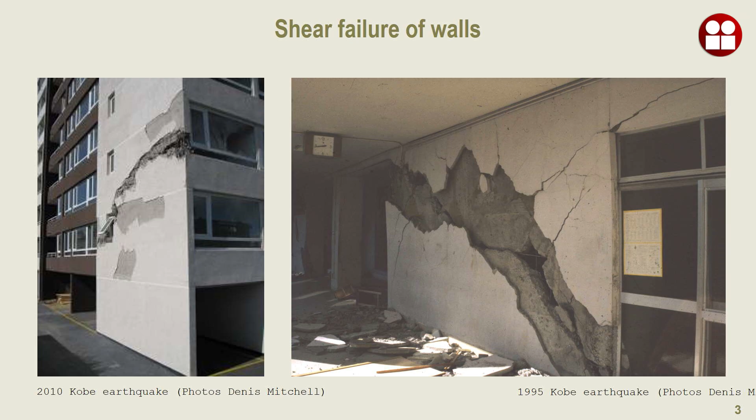And we have examples of shear failure. They are rare, but you can find some, actually this one here in Chile and in Japan. And you might have seen also that it's not shear failure of walls, because that building had a number of shear walls. There were some problems with them, particularly they were too thin and not well designed.

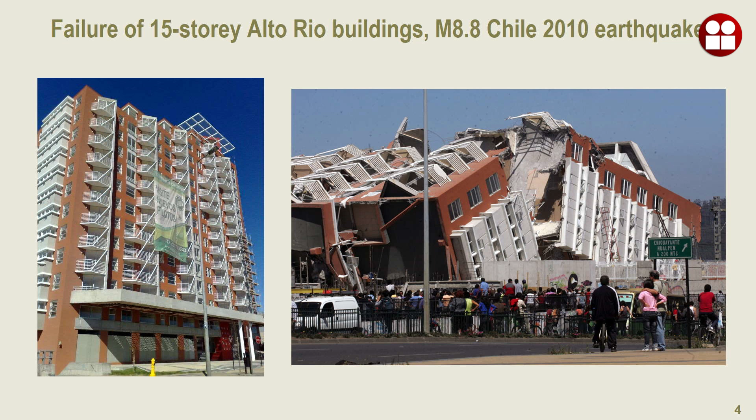In Canada, we use capacity design, where you have a ductile link, some say in French, that will protect all the fragile system. When I say fragile system, I would say shear is a fragile failure, and you want to avoid that. So flexure will be the mode of failure that you will be looking for.

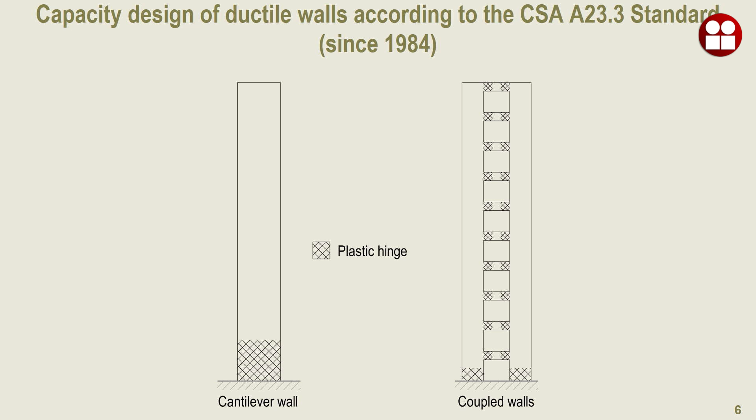In Canada then, we will design a wall to have a plastic hinge at the base, and coupled walls with plastic hinges at the end of all coupling beams before having hinges at the base of the walls. And if you look at the simple seismic force distribution, this is the factored bending moment, and you have the factored shear. When I say factored, it's the elastic force times a factor that is usually larger than 1.

Now, when we do the design, we will calculate the reinforcement here, estimate the probable moment resistance, which is calculated with yield stress equal to 1.25 Fy. Having MP here, we would increase the shear by that ratio of the probable moment resistance divided by the factored moment resistance at the demand, actually at the base.

And in 1995, following the New Zealand code, it was said to increase again the shear by a factor beta V. The problem with the Canadian code is that they said to increase it, but they didn't give any formula. So nobody knows what to do with that, because beta V doesn't have any value or any reference to calculate it.

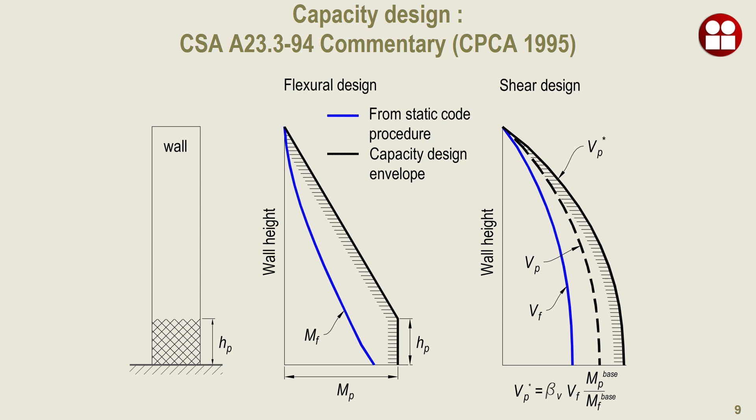It was recognized in one paper in the 1970s that even though you design under capacity design principle, you might have yielding higher up, not only at the base, but particularly the shear would be larger than even the one that was amplified. It was not really recognized why we had that increase in shear when it would have been limited by the capacity of the wall at the base.

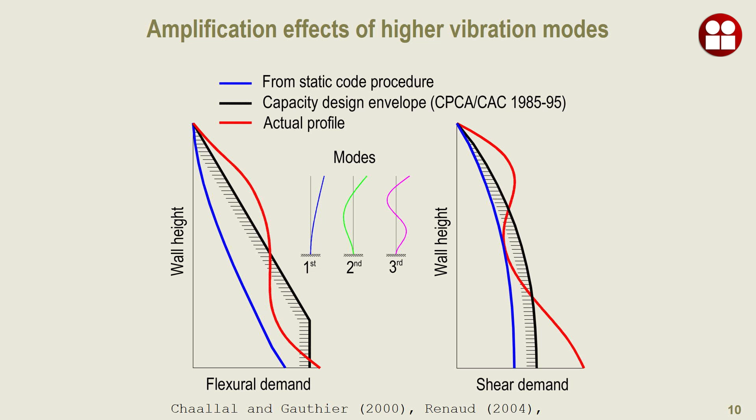Later on, it was recognized that it's due to the higher modes that you would have that increase.

In 1984, the Canadian code changed, and instead of calculating the probable moment, what we do is design for the moment resistance, keep the same amount of reinforcement over the plastic hinge zone, calculate the moment resistance at that point, take the ratio of that moment to this moment, let's say it's about 2, and increase all the bending moment by the factor obtained at the top of the plastic hinge, so by 2.

Having done so, you would increase also the shear diagram, again by multiplying by the probable moment resistance divided by the demand at the base. This is the design shear that you would use to design your wall.

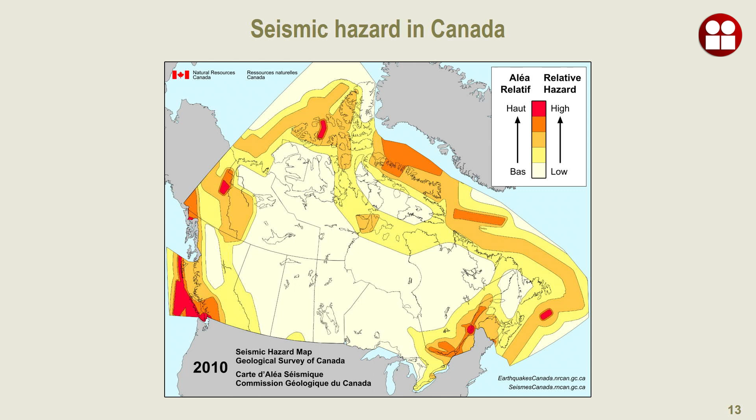In Canada, there are really two zones of seismic activity. In the west, Vancouver being the highest risk, and you have Montreal with the highest risk in the eastern part. The earthquake waves propagate at a very short distance in the west, but in the east they propagate at very large distance - any earthquake here would propagate up to New York, Boston, or even Philadelphia. Also, there is contribution of higher frequency in this eastern zone compared to the west part of Canada. So we have to take care of both areas, western and eastern Canada.

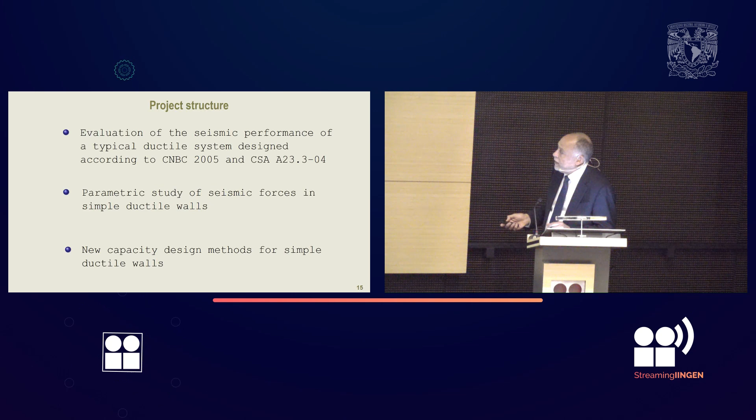So let's look at shear walls first, and we considered the western part first. What we did is try to see what are the most important characteristics on the shear amplification. So we studied different types of walls, number of stories, fundamental period, aspect ratios, flexural overstrength at the wall base.

Flexural overstrength is the probable moment divided by the demand. It could be between 1.3 to 3 or even 4.

Site class varied from A, C, D, and E, and wall cross-section as you have here. We found out that only the period of vibration will control the response. So that's one particular parameter we have to account for, and flexural overstrength needs to be accounted for as well.

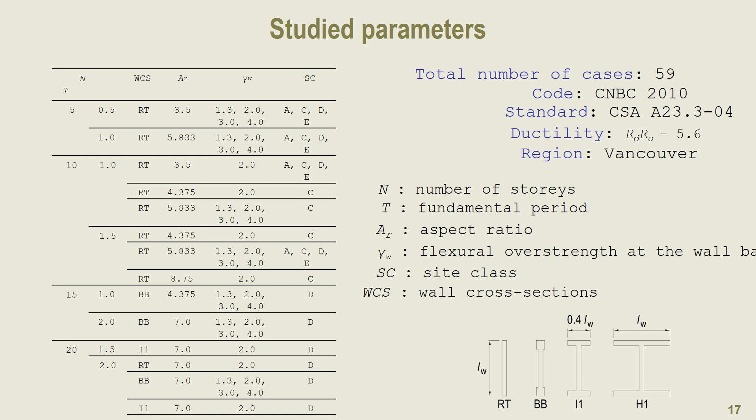What we did - I didn't mention it, but let me get back - we have a building with a number of stories ranging from about 5 to 40 stories, and we modeled it with two computer programs, OpenSees and Vector2 from University of Toronto.

Vector2 has interaction between flexure and shear, so it's way better than OpenSees, which doesn't have interaction between shear and flexure.

We have a concrete strength of 40, Fy is 400, and we varied rho according to what we would have in practice. 10% of axial load is usually what is the axial load acting on walls. P-delta effect was accounted for, and damping we took 2% for the first and the last period of vibration of importance.

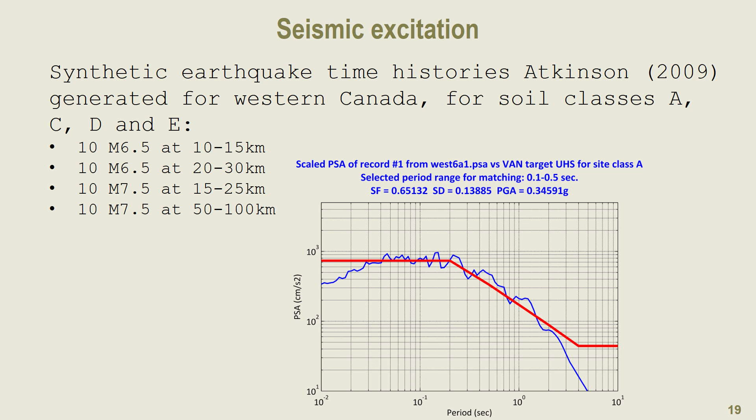For the earthquake, we started about 10 years ago by using generated earthquakes by Atkinson, but we changed after that. What you would have is the probable shear resistance, and we would find that the shear is larger than that - we call that V dynamic. We can then estimate the amplification factor, omega V, which is the ratio of V dynamic divided by V probable. We can calculate that at the base, or calculate an average over all stories.

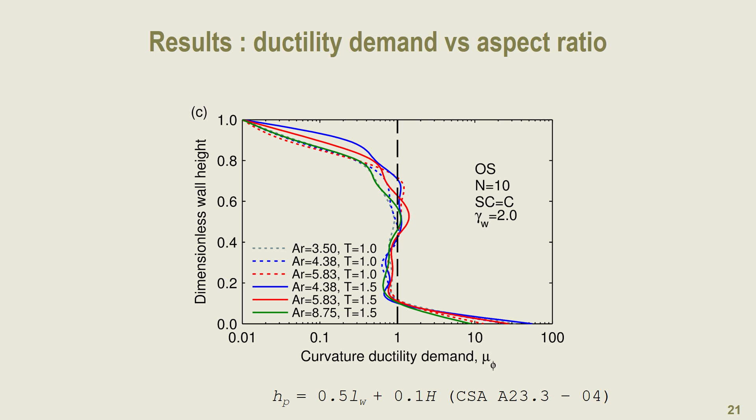We found out that those factors didn't influence quite a lot, except that for gamma W less than 2, we would have hinges forming somewhere else from the base. But if you have gamma W equal to 2 or larger, you would not have yielding higher up. So really, one thing a designer could do is just start by designing with gamma W equal to 2 or even larger, and then you will not have to consider yielding at height.

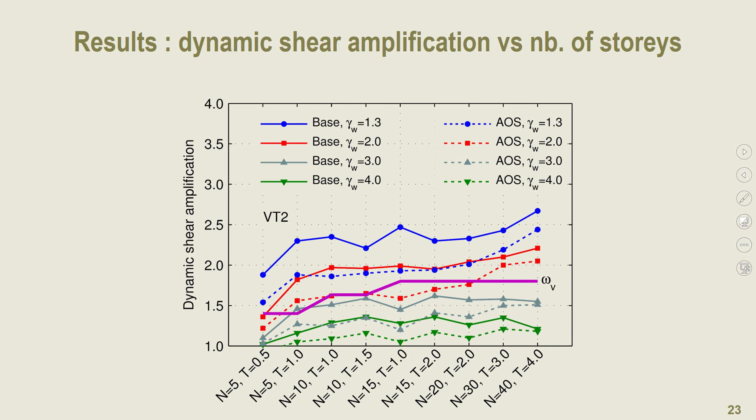The important thing is that graph, where depending on the period of vibration - this is number of stories, because in New Zealand they work with number of stories - if you consider the period of vibration from 0.5 to 4, you see the dynamic amplification factor is larger than 1. Most of the time it will be constant over the range of period, larger than 1. So having done that, we proposed it to the Canadian Code, and they adopted it somewhat, but limited it to 1.5, whereas you could have it even larger than 1.5, say 2, or even going to 2.5.

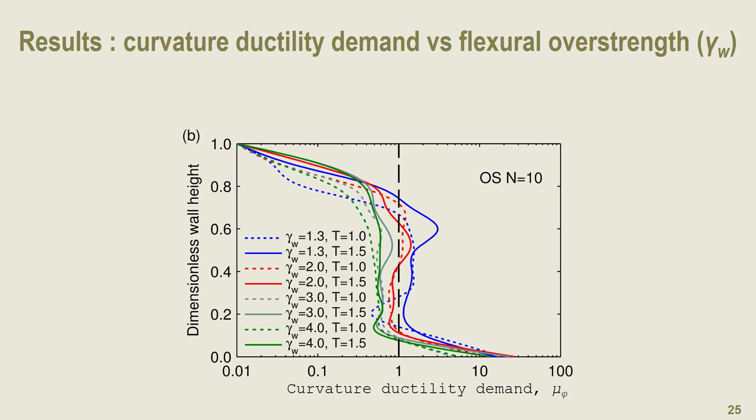Let me skip so I don't overdo the time that was allocated to me.

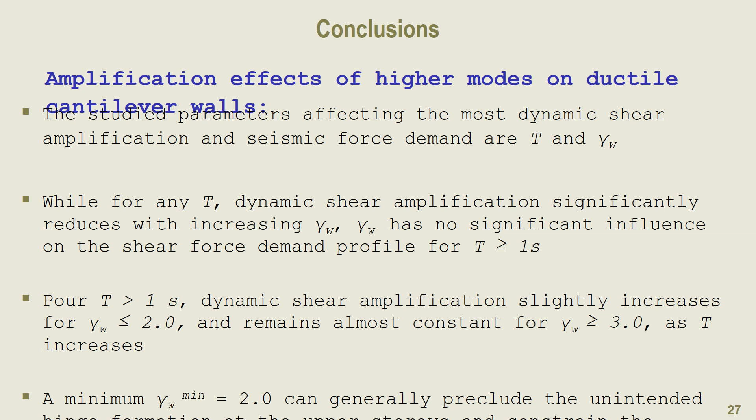The capacity design method prescribed by the CSA produces envelopes that significantly underestimate the demand, so you might have potential risk of shear failure, and then you need to use an amplification factor. The important conclusion is that for a period larger than 1 second, if you have gamma W equal to 2, you don't have to worry about yielding of the wall higher up the height.

The thing is, we did it for Western Canada first, so we had to do it for Eastern Canada, and then we started again. I didn't mention it, but the total number of analyses we did for Western Canada is over 10,000. We did the same for Eastern Canada, over 10,000 analyses, because you have a number of buildings, about 40 different time histories to consider for each building, and different soil classes, different gamma W, so it's a very large number. We had to use the parallel computer at University of Sherbrooke, and we could do it in a reasonable amount of time.

This is the spectrum for Western Canada, in Vancouver. So we had to find a site in Eastern Canada that compares with the western part, and we chose Rivière-du-Loup to put the buildings and do the analysis.

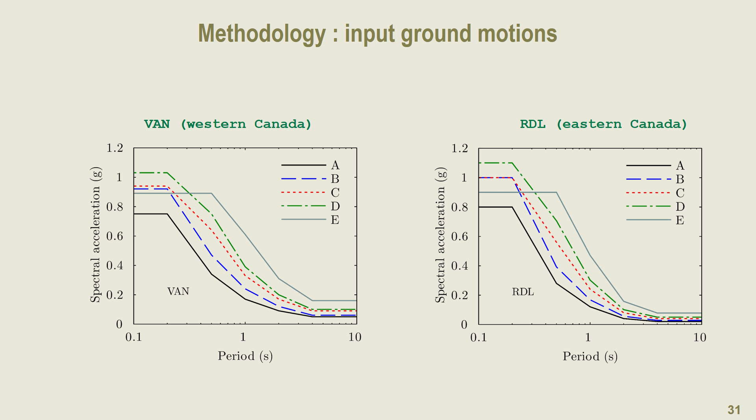The spectra are compatible, not in the frequency content as I mentioned, because higher frequency content can be found in the eastern compared to the western part of Canada. Again, all the analyses show that you do have amplification and formation of plastic hinges higher up if gamma W is less than 2. If it's larger than 2, then not a big problem. We do have shear amplification.

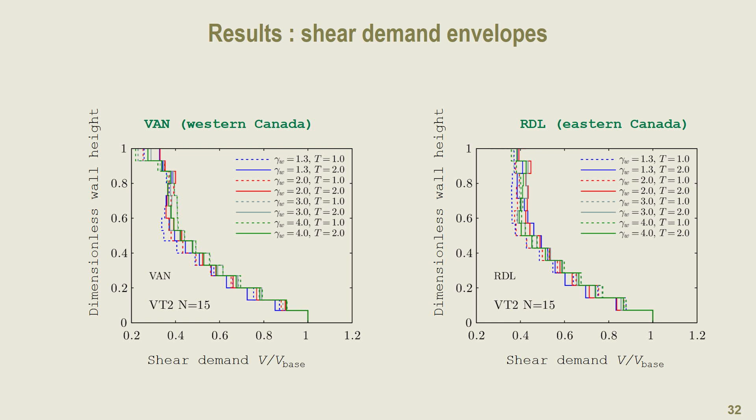The difference actually is that we have shear amplification even for very short buildings compared to Vancouver, for example. Again, as you can see here, we do have possibility of yielding somewhere along the height of the wall. At 1 here is yielding, so at the base we do have a plastic hinge at the base, but we can have yielding here when you have gamma W less than 2.

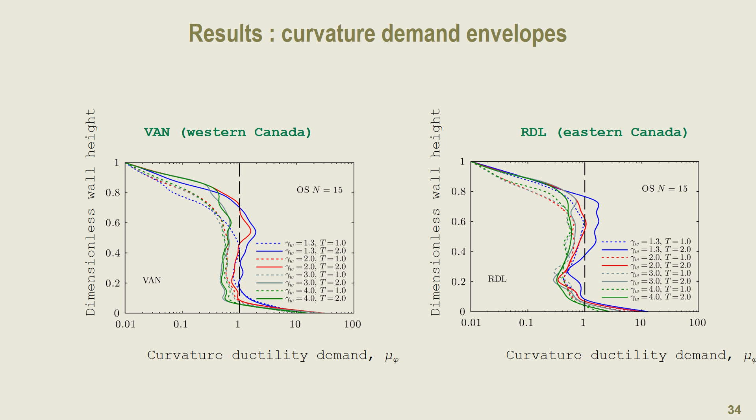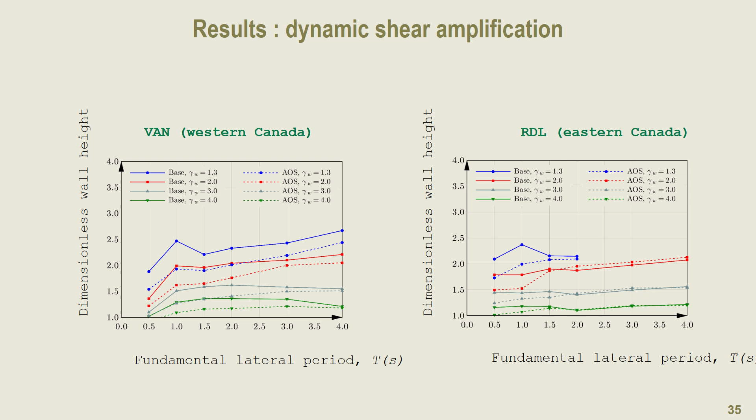So this was the first proposal for the west part of Canada. Again, as you can see, there is an increase up to 1 second, and then about constant from there on. Same for Eastern Canada, although I'm not showing it here. We do have contribution between 0.25 and 0.5, which is different than for the west part of Canada.

So this is what, from the results we obtained, has been adopted in the Canadian code: something equal to 1 up to 0.25, increasing linearly up to, say, 0.5, and then kept constant over the range of lateral period, but limited to 1.5. That is, you cannot have the factor larger than 1.5. As I mentioned, we found in our analysis that you can have a factor of 2 or 2.5.

Coupled walls were not considered. Why? Because it was thought that coupled walls are like frames, and we haven't seen any shear amplification in frames. So it was decided not to have amplification for coupled walls. So I decided to have a look at it and see what is going on.

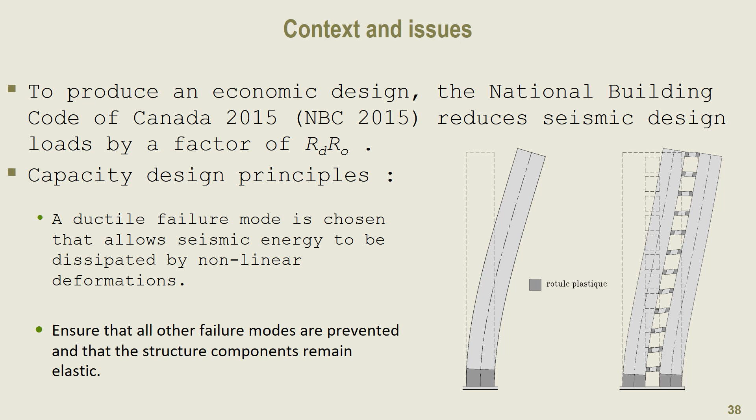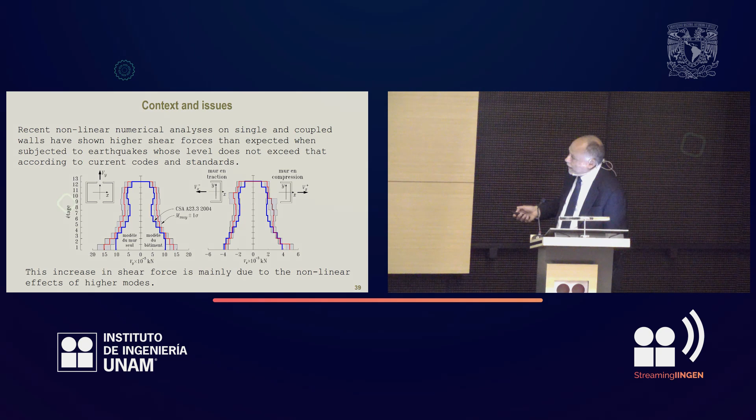I remind you that for coupled walls, yielding is at the end of the coupling beams before you have yielding at the base of the wall, according to capacity design principles. And I can see that because that's basically what you have seen before - this is the actual probable shear resistance, and then when you do the analysis, the average plus or minus 1 standard deviation is quite larger actually than the probable shear resistance.

Let me quickly mention that when you design in Canada, the design shear V is equal to V elastic - some formula very close to whatever you have in different countries - divided by RD and divided by RO, as opposed to the United States, here we have two different factors. These are ductility-related factors varying from 1 to 4, and RO is the overstrength factor that would vary between 1 and 1.7 at best.

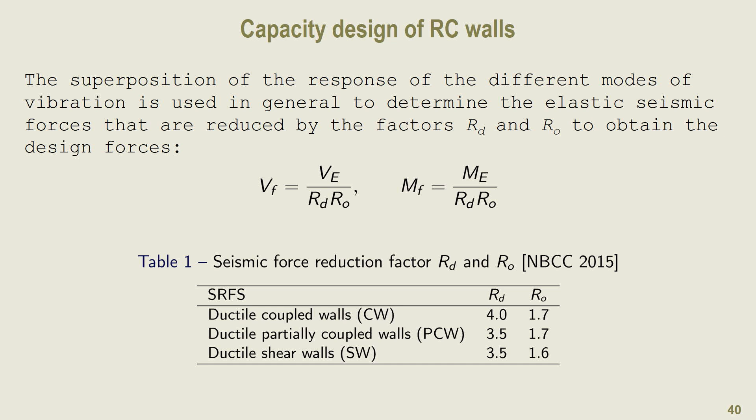So for ductile coupled walls, RD would be equal to 4 and RO 1.7. For partially coupled walls, 3.5 and 1.7. And for shear walls, 3.5 and 1.6.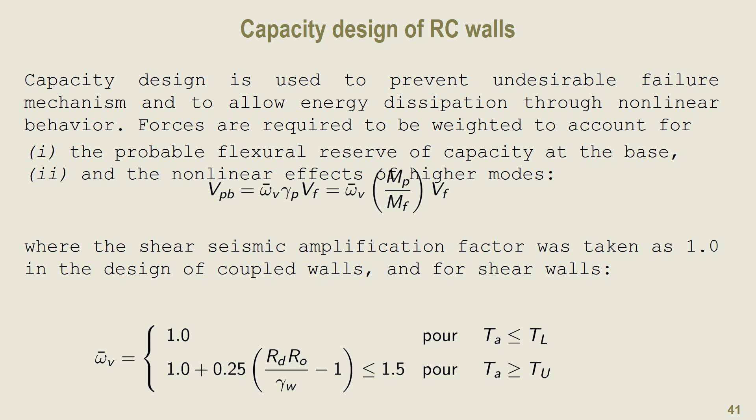So this is actually the formula that has been used in the Canadian code. And we did some parametric study again to see the effect of all those parameters, and then after that conduct the study, retaining only the most significant parameters.

So this is the set of data that we use. Degree of coupling is the moment taken by the axial load acting on both walls divided by the total overturning moment. And it varies between 30% to 75%. When you reach 65%, below 65% in Canada, we call that partially coupled walls. Larger than 65%, it's coupled, fully coupled ductile walls. And overstrength varied between 2 to 4.

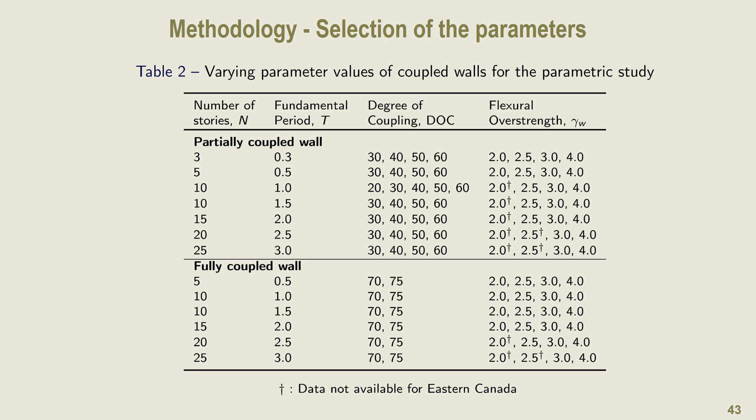As I mentioned before, we use the uniform hazard spectra to generate the earthquakes. But it was actually recognized that this is not very good to use that type of signal for the studies that we did. So we changed, and what we are using now is the conditional mean spectrum, where you condition the time history on a specific period. Usually it's the first period; in that particular case we would use the second period. But we would also condition it on a minimum and a maximum value at 1 or 2 standard deviations, so we would have a good match of the time history compared to the spectrum that should be used for the area.

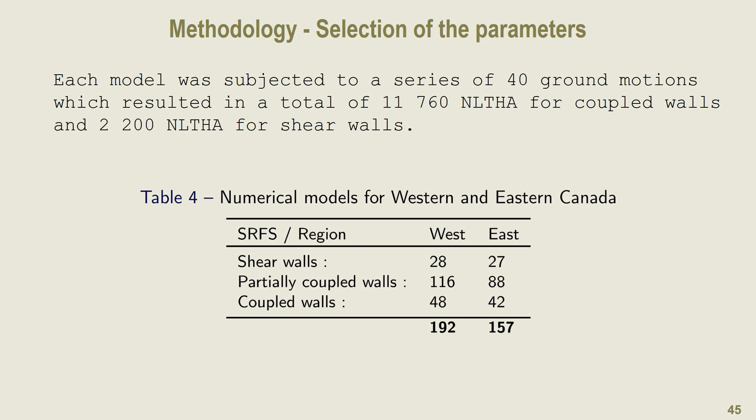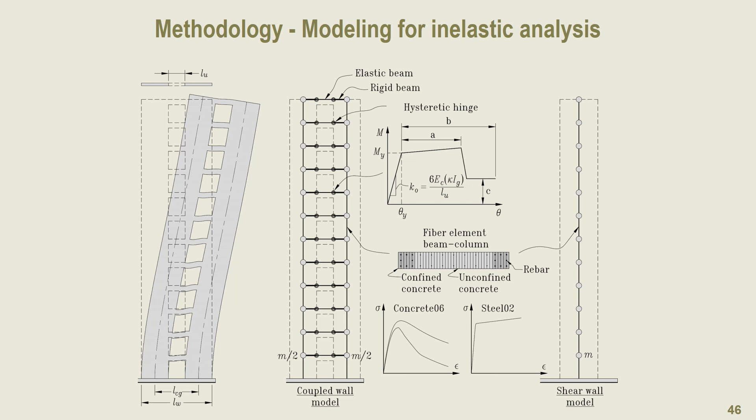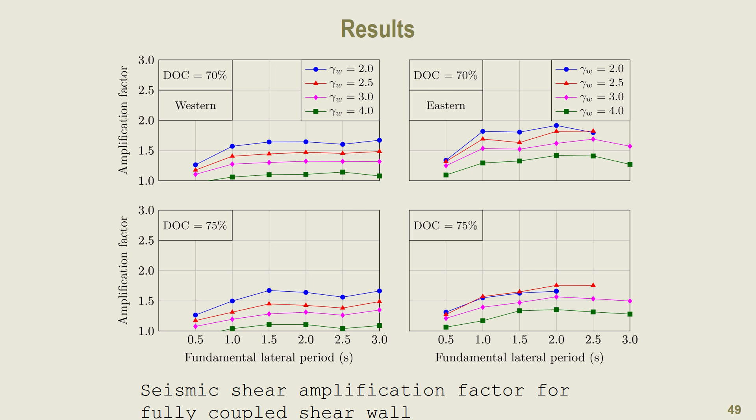The conclusion: the amplification varies with the degree of coupling, from 30 to 45, reducing again at 50 and 60, and at 70 we have a quite reduced value, around less than 1.5. The amplification factor, when we look at it against the fundamental period for the West and the East, shows about the same tendency, a little bit larger for the East, with contribution of higher modes even for short buildings, as opposed to the western part of Canada.

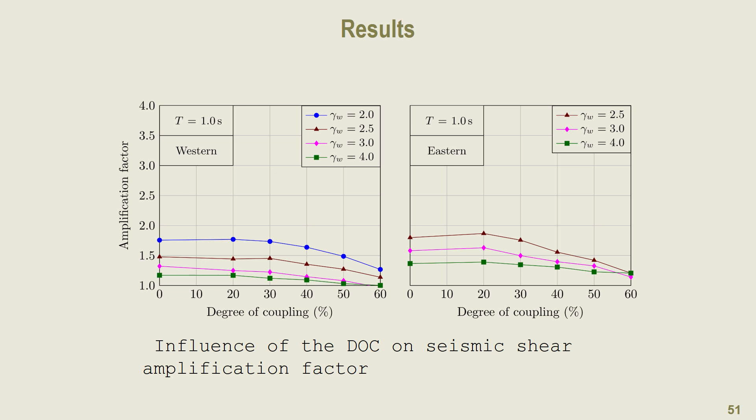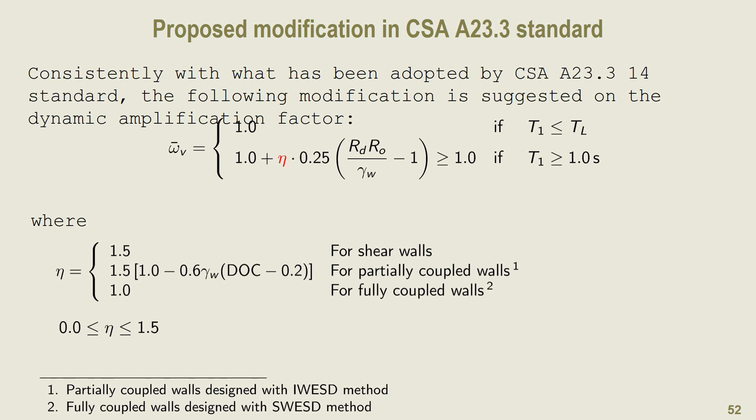So there is some change to be done on the code. I hope in the next edition of the code we should have it. The amplification as a factor of degree of coupling starts at a constant value and then reduces with increasing degree of coupling. It's an easy thing to fix because you just have to enter that parameter, which depends on whether you have a shear wall, a partially coupled shear wall, or a fully coupled shear wall, and depends only on the degree of coupling. Hopefully that can cover it, except that the 1.5 maximum cap value that we have in Canada, I don't think that's good enough. The expression for eta can be found easily, depending on gamma W and the degree of coupling.

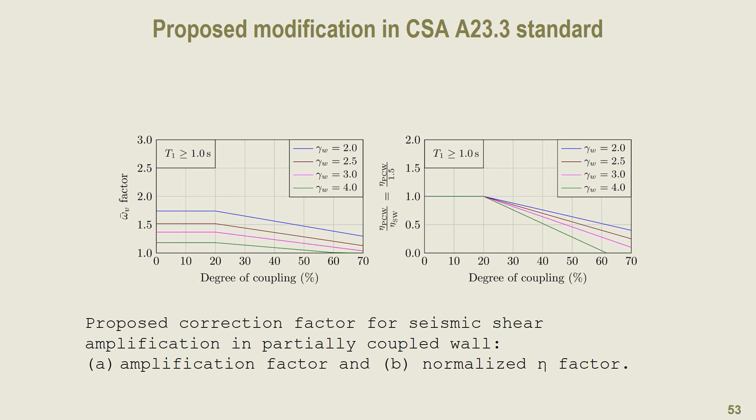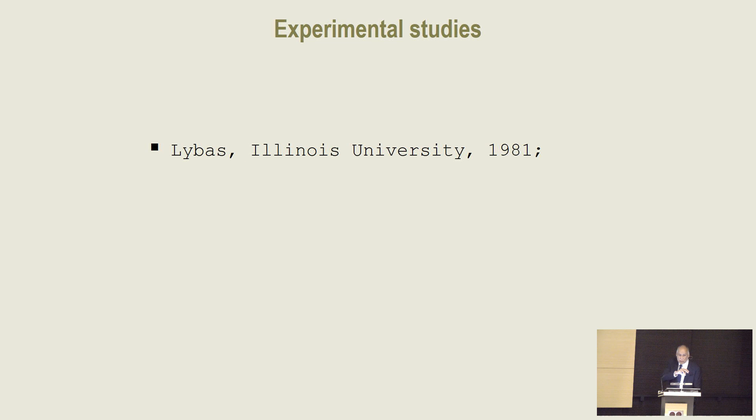And for experimental studies, I know of only one, by Lybas from University of Illinois. It was by accident, because he tested a small scale coupled wall system and saw that the shear was larger than what was expected.

So let me make it very simple. When you have a triangular seismic load applied to your building, the resultant will be at a certain height, R. When you have yielding at the base, the distribution changes, and that force's location moves lower. The moment is still the same because the force increased while R is reducing, but force times lever arm remains equal to that moment. However, shear will be larger because that force is increasing due to the reduced lever arm.

So the thing that we decided to do is a hybrid test, and we designed an 8-story building. The upper part we kept elastic, although it could have yielding, and the base over the height of the plastic hinge we would test in the laboratory. The two are actually linked - we will analyze this with the computer program, it's linear, and this part will be tested in the laboratory.

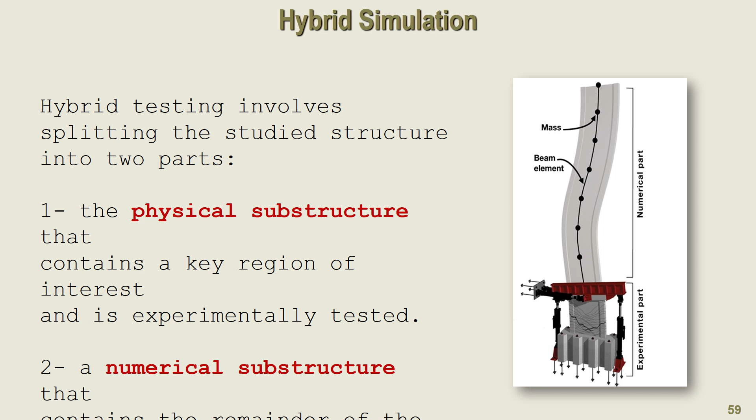So let me quickly move to the experimental verification. What is going on is you're modeling this, and this is the equation of motion. There is a link between the two. I don't know if you're familiar with hybrid tests.

The stiffness matrix times the displacement would give you the force that will be input back to the analysis. You would feed the displacement that needs to be imposed horizontally. It's not an easy test to do - actually it's a very, very complicated test and took us a long time before we could fix everything.

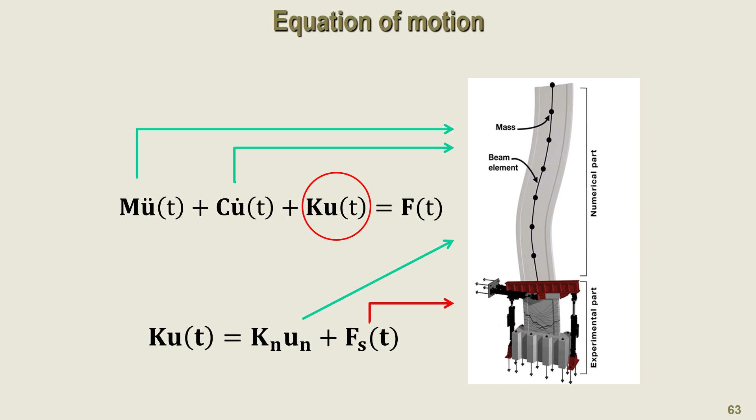So really what is going on here: you take the time history, send a displacement to the jacks here and to the two vertical jacks that move horizontally and rotate the building or the wall, then measure the force in all 4 jacks, send it to the finite element program, calculate displacement, velocity, and acceleration, go back here and keep doing that in a loop and progress in the test.

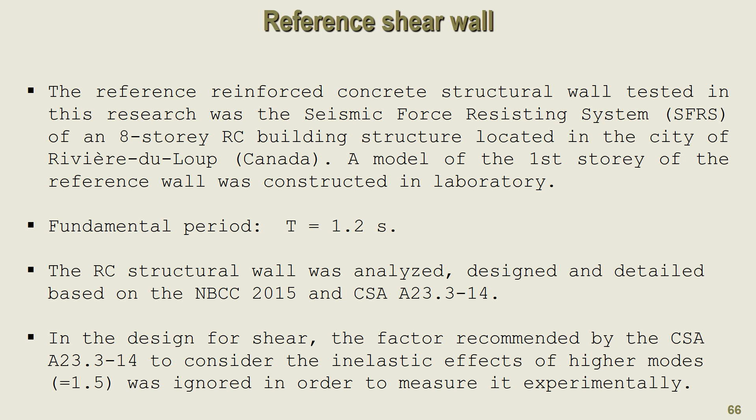So really we had a building with a 1.2 second period. As I mentioned, it's a single shear wall designed according to CSA A23.3 2014, which is the latest edition of the code.

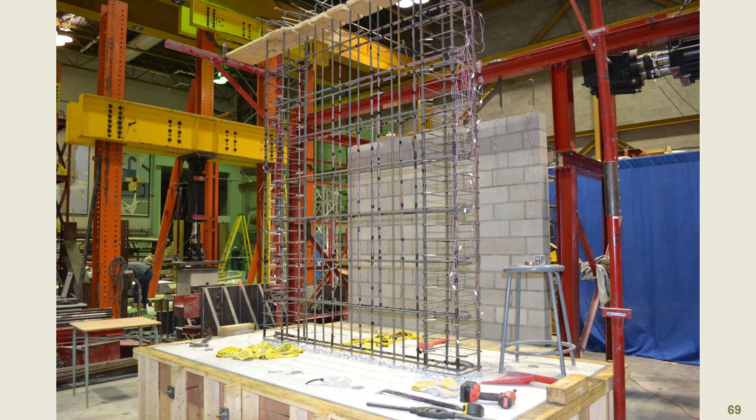This is the base, it's pretty big actually. This is the reinforcement for the base before casting, and this is after casting the base. This is the wall without the head - we will cast that later on. In the back, this is a masonry wall that we would be testing later on.

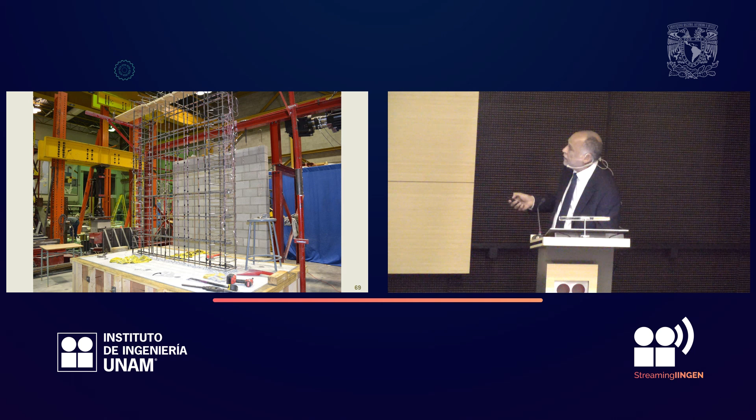For the test, there is a set of computer programs that need to be used. OpenSees is the main finite element program analyzing the top part of the building and predicting the displacement. OpenFresco takes those values and transfers them to LabVIEW. LabVIEW transfers those to the controlling system, which is an MTS control system that imposes the displacement, gets back to OpenFresco, and OpenFresco sends the result to OpenSees, and that is done in a loop.

The trouble is that connection point, which needs to maintain compatibility between the two. If it was stiff it would be easy, but when you have cracking there's a problem, because the neutral axis moves from one point to the other, whereas OpenSees considers that the rotation is about the center of gravity. So we had a big problem there.

The other problem is that it's very stiff at the beginning. When it's cracked, it becomes very flexible, and control is a little bit tricky at the start. So we had to control that point.

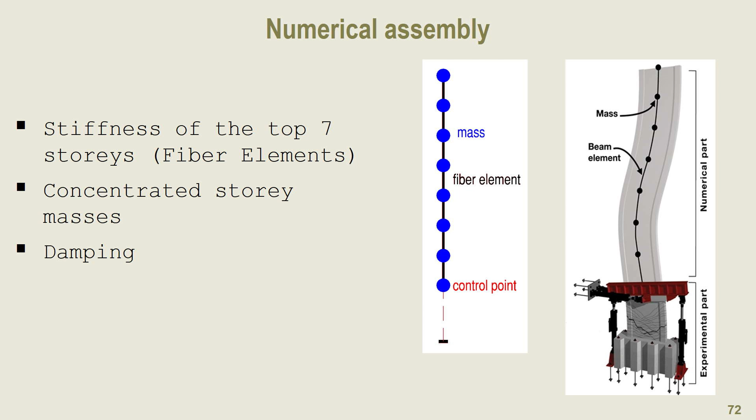So what we did: first let's look at the equation of motion that you have here. There is only one mass in direction 2, M2, which will give you a damping matrix proportional to M and K. So there is a term that is here and another that is there, and that one will cause trouble.

Why? Because we don't have that displacement in the vertical direction, and we need to remove it, because in OpenSees the point of rotation doesn't move up and down, so we cannot have a velocity and a displacement at that point. What we did, since Fy, the vertical load, needs to remain constant, we had to kill that term. How did we do that?

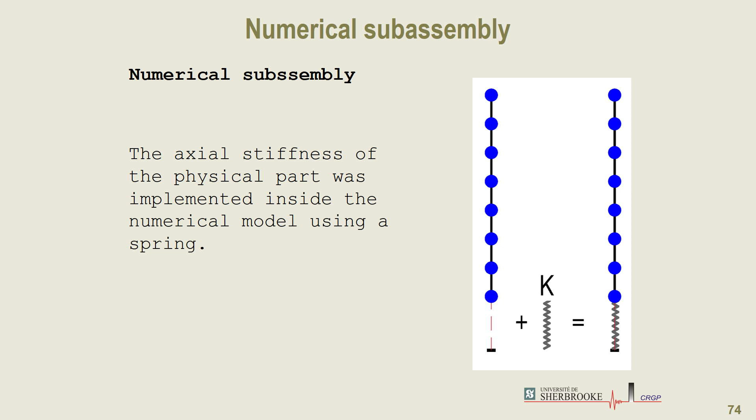By putting a zero-length element of constant stiffness, not in the experimental part but in the numerical part. Because it's constant, the axial load will remain constant. Then we just have to verify that we have equilibrium between the two vertical actuators.

So that's what I explained. The trouble is, at each step of the analysis, we need to find where that neutral axis is. That's a very complicated problem, actually.

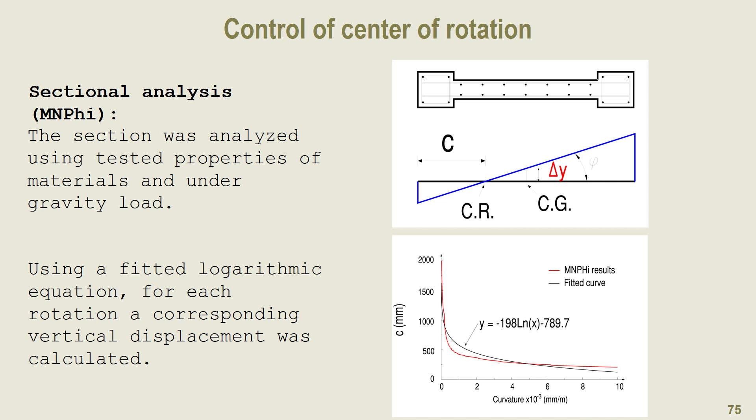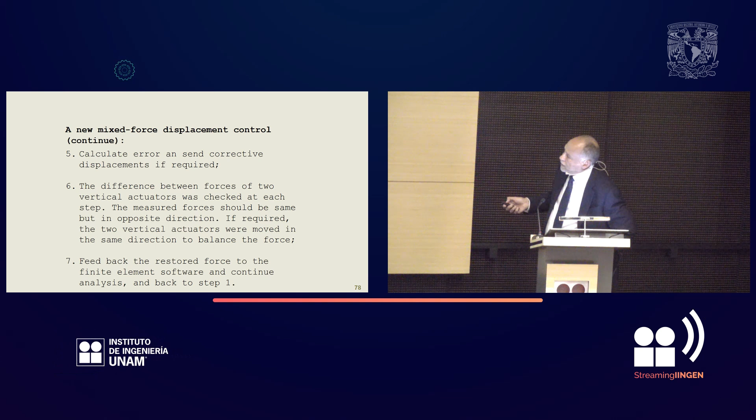We had actually to control the error and then also correct for when we have to stop. I don't want to go into that, it's kind of very complicated. But anyway, from OpenSees here to OpenFresco, we are solving, introducing the demand, seeing if we need to correct. If we don't need to correct, or we need to correct, we have to go up here, and again verify that we have equilibrium between the vertical actuators. If we have equilibrium, we can move up and then go back and start the loop again, like that.

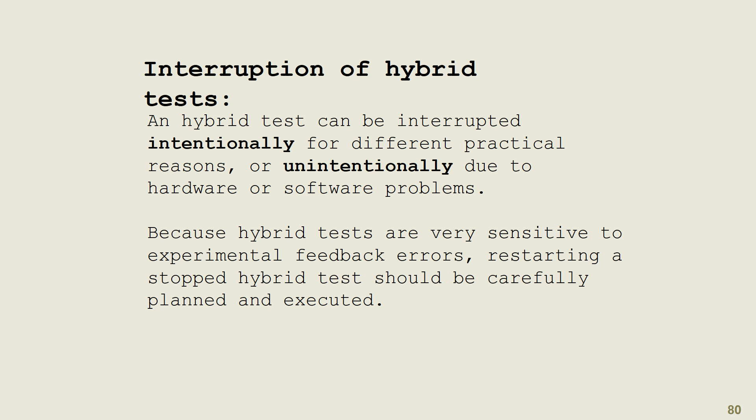This is the numerical part, and this is the test part of the experiment. The problem is sometimes you need to interrupt. One test would take more than one day to do, maybe two to three days, so you have to restart the next day. So we had to develop a restart procedure that I don't want to get into really. Or if it's interrupted for any reason, we have to restart it again. So we developed a method of actually starting the test after some interruption.

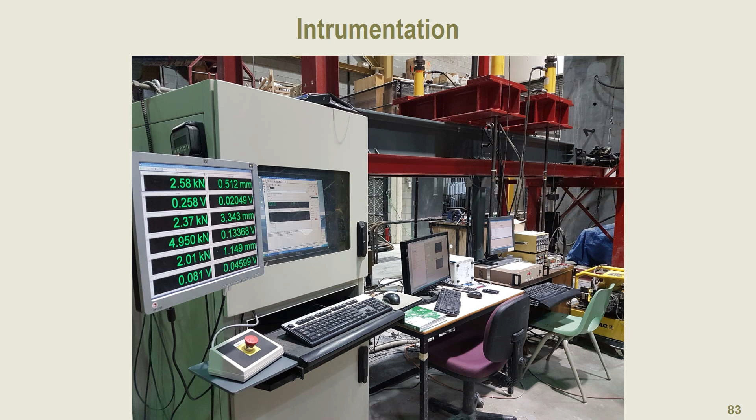And I mentioned that, this is the final setup, as you can see here. The wall was heavily instrumented to measure even the displacement at the base of the wall. All the reinforcement was also instrumented, with gauges here and horizontal for shear.

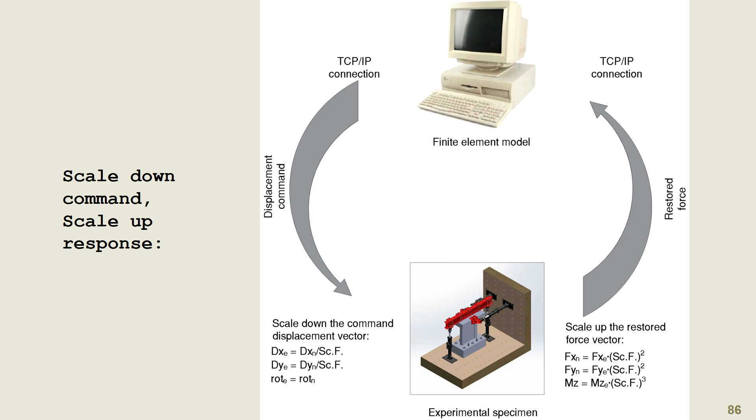What we did is use three different motions: GM0, which is a very small earthquake that we use just to make sure our test setup is functioning properly; GM1, which is actually the design earthquake level; and GM2, which is a much larger one and shorter.

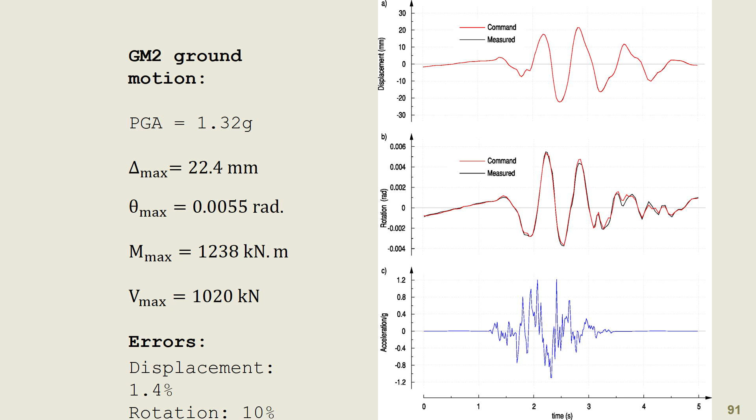So when you compare, you have to compare the command and what is measured, and as you can see, we are doing pretty well in terms of controlling the displacement that we are imposing on the specimen. Again here, comparison between the command and the measurement for the GM2 motion, and same for the GM3 motion, so we do have good control of the system.

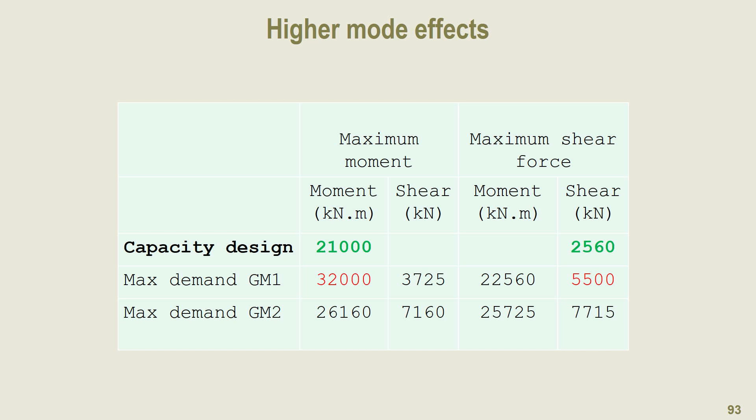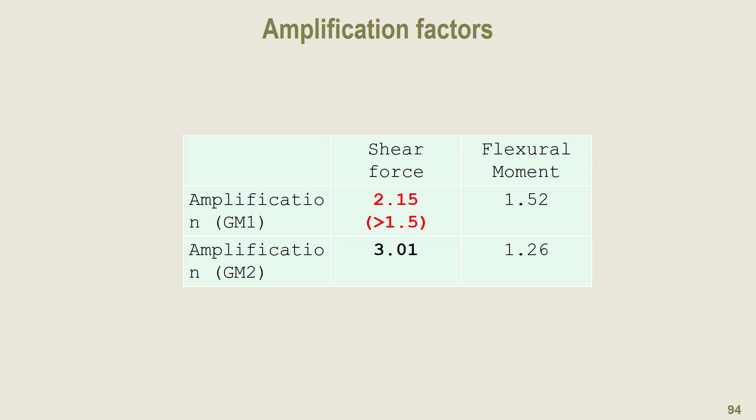Shear, we have measured at maximum moment 3,700 kilonewtons and 7,160. Remember, capacity design should limit the shear to 2,500, and we are measuring actually 7,000 for shear, or 5,000. So a factor of 2 to even close to 3. So amplification for GM1 certainly larger than 1.5, and for GM2 about 3.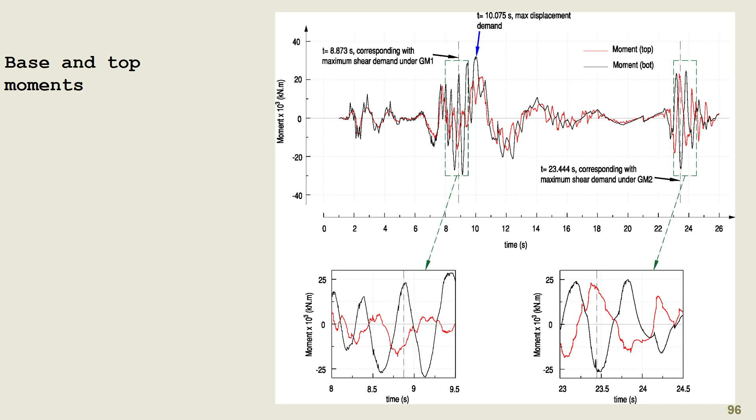Now, that's a nice thing, we could actually prove why we do have shear amplification. If you enlarge that section of the result, at the moment where you have maximum shear or maximum moment, you have different signs for the moment at the base and at the top of the wall. This means it's not the first mode controlling the shear, but the second, maybe the third mode. This is pretty clear here, because at maximum shear demand, it's not the first mode we are having, but certainly the second mode that is controlling the result.

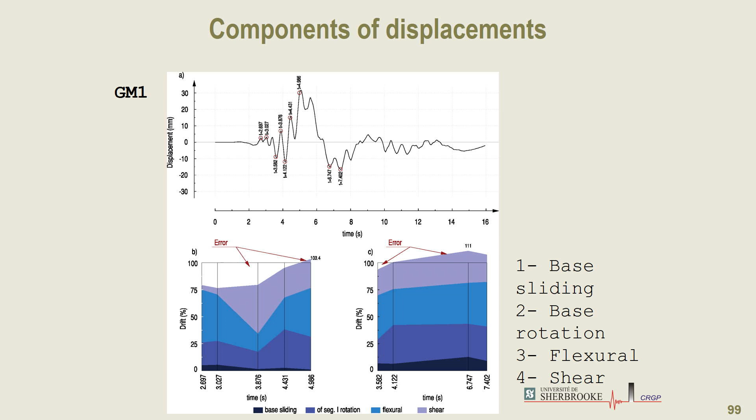Same result: we calculated the contribution of the different contributors to the displacement at the top. So displacement due to elongation of the bars at the base is the first part you have here. Not significant, but still you need to consider it. And sliding also; rotation at the base is that. Flexural displacement is that contribution here, and shear is not negligible at all. There are some errors, evidently, in the measurement. Here we don't have the 100% that is required, and here it's a little bit larger than what is supposed to be.

I don't know how do you make a movie. Nope. Does it move? Oh, okay.

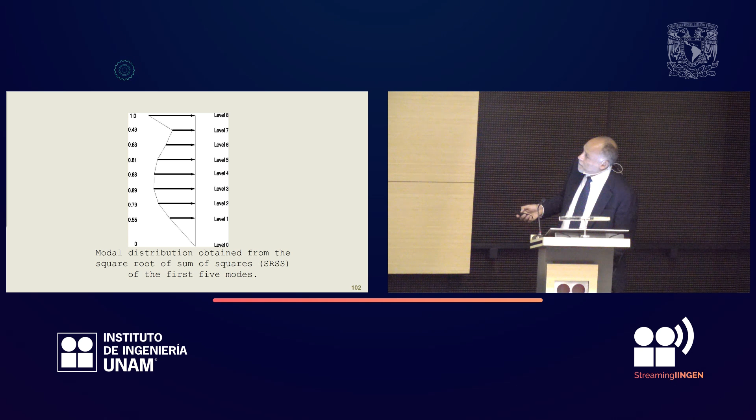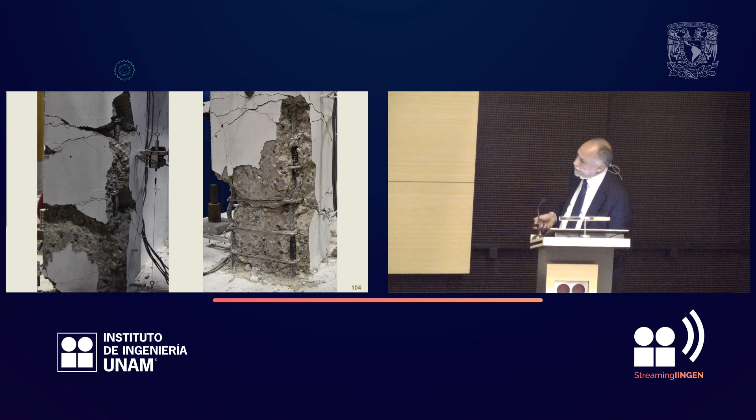We did some pushover at the end, cycling at two times at the same level, just to verify the capacity of the wall. At some point, you would have buckling of the longitudinal bars and breaking of some transverse bars in the confined zone, and crushing of the concrete at the end of the walls.

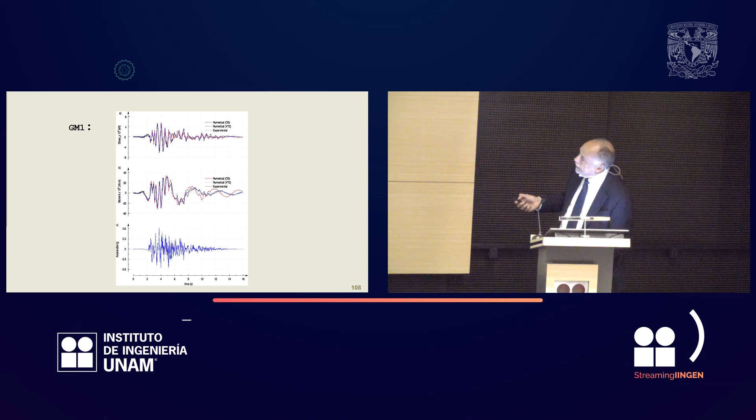This is the cyclic behavior that was measured. If you compare prediction with test result, we have very good agreement. Not perfect. OpenSees is certainly... VecTor2 is certainly better than OpenSees at predicting the result, but the two give quite good results. Again here, with some discrepancies at the end, but reasonable in terms of result, even for the GM2 motion.

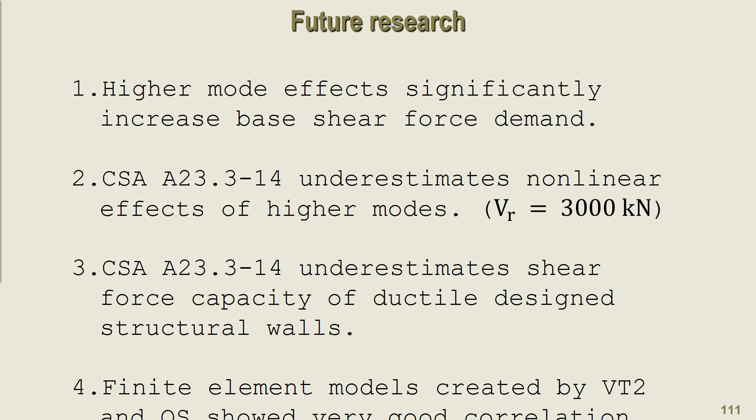Conclusion: we need to account for shear amplification. It's something important. The design for shear is very conservative, that's why you don't see problems coming out of buildings during earthquakes, but it still needs to be accounted for. The factor is limited to 1.5 in Canada, and 1.8 in New Zealand. I think it's a little bit low, it could go to 2, and at 2 I would probably be more comfortable myself.

Future research: one thing that interests us right now is the behavior of secondary elements. The shear wall or coupled wall are usually used as the primary seismic force resisting system, and all the beams and columns are considered secondary elements that need only to take the gravity loads. However, you need to find the displacement, and it's not easy. Even in ASCE 7 and ACI, nobody really knows how to calculate that properly. We have published two papers on that subject.

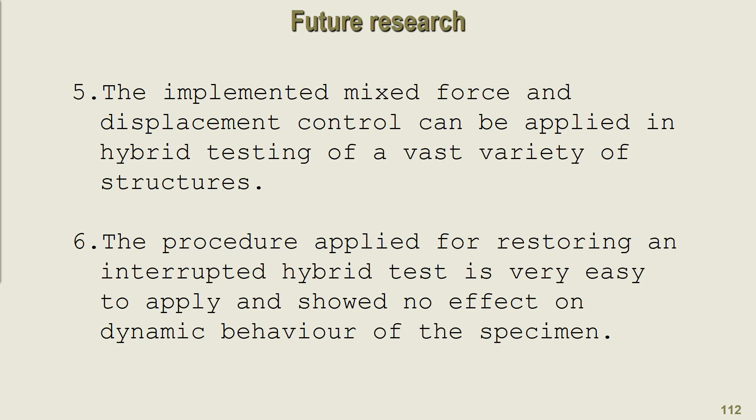The next thing we would be doing is a distributed test where the shear wall will be tested at Sherbrooke and the columns and beams will be tested at two different universities, plus the numerical model will be running at the same time. I think I would stop here.

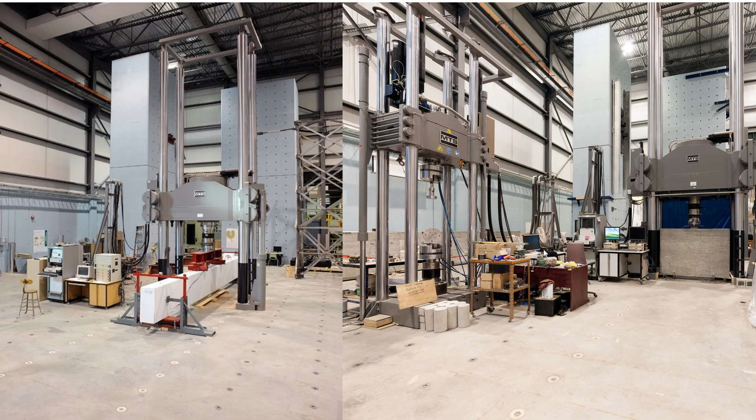We tested a full-size two-story building with high-strength concrete. That was the picture shown a moment ago, and we did it for damage detection.

We were loading with earthquake forces at different levels, and each time we would test the structure dynamically to obtain damping and frequencies, and from that we could predict where the damage was. That was the first laboratory.

That's the second laboratory with two walls, 12 meters high, with a very large, strong floor. We have a very big machine here, 12,000 kilonewton, actually dynamic also, MTS. Everything in the lab is MTS, which makes us like a client of MTS.

This is a dynamic press here, 700 kilonewton, high frequency, and another press, a smaller one, to test cylinders.

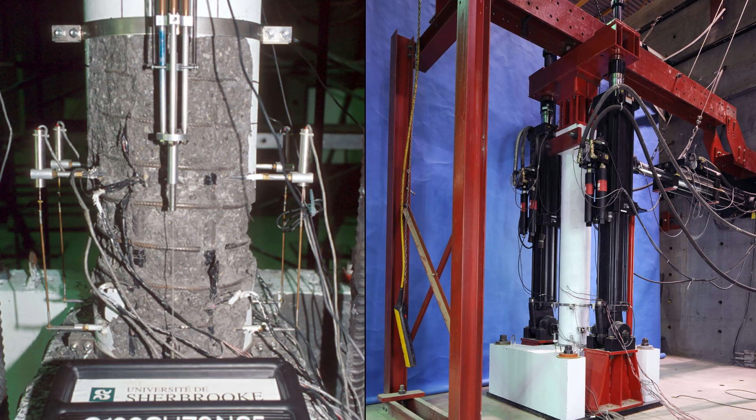So you saw that wall. We also have a setup to test cyclic tests of reinforced concrete columns.

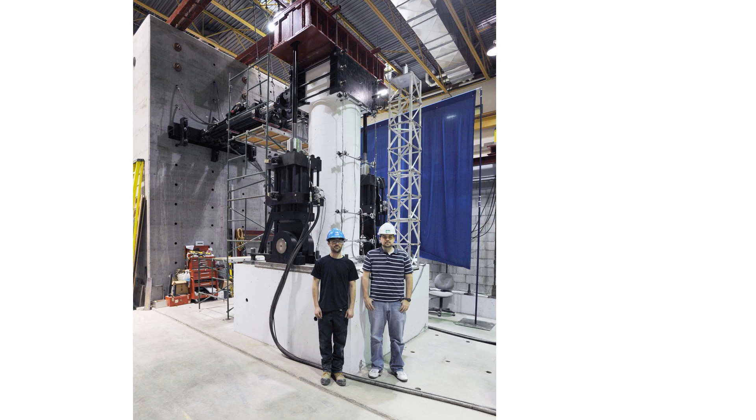This is the latest test we have been doing. The gentleman is from Colombia, so he speaks Spanish. Considering his height, he is about 1.8 meters, about my height. You can see the size of the column, and the diameter is about 900 millimeters.

We have a shaking table, not as big as what you have here, 3 meters by 3 meters, still an MTS machine, unidirectional though, and we are developing some dampers to introduce between the diagonals that you have here.

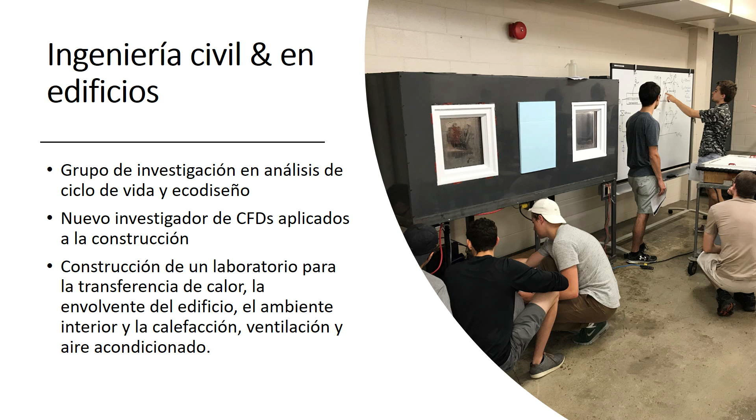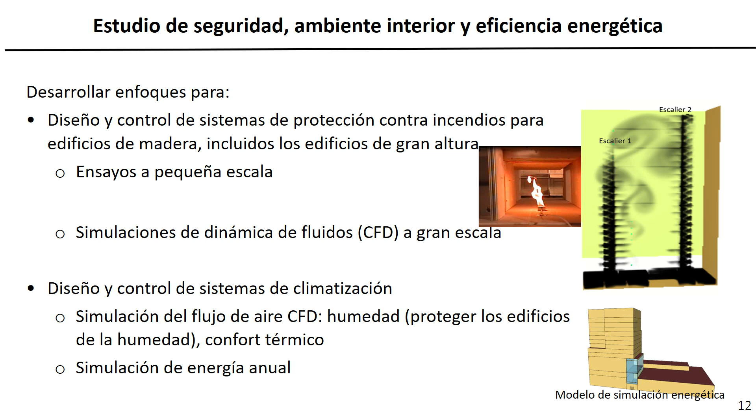That was something my head of department asked me to present to you. It's in Spanish. We have two groups, civil engineering and construction. It's the only university with those two options. We do actually have a wind tunnel, and I think that's about it. If you have any questions, please.

I'll try to answer. Let me mention that I'm quite honored to be in a room named after Emilio Rosenblueth. This would be the highlight of my career. I hope you know who that person is. Good.

Thanks for your presentation. When calculating the displacement demands to be applied to the test unit in this hybrid test, you do some analysis where there is a need to use some values and model for the damping. So the question is, how sensitive could the experimental results be to different assumptions of damping? For instance, you are using Rayleigh damping. Some people suggest using constant damping, almost very close to zero sometimes.

Okay, it's a good question. And every time I submit papers, there are always questions about damping. People ask, why are you not using 5% damping or even 10% damping? There are two dampings there. There is inherent damping, which we tested under dynamic excitation, and it's close to 1% to 2%, never higher than 2%. I could show you some results, but we don't have time.